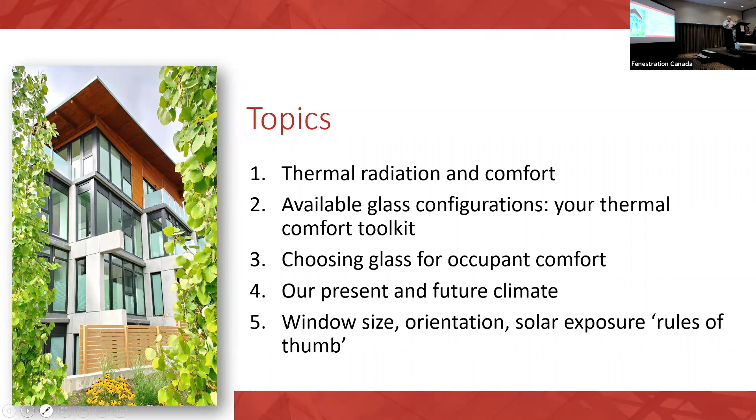I'm going to speak a little bit about our present and future climate, because in the context of solar heat gain, we need to be not looking at the past, but looking at the future of our climate, and perhaps radically rethinking how we approach that subject. And then some rules of thumb. I was hoping to come up with some really intelligent rules of thumb, and realized it wasn't that easy. But I put some thoughts together, and you'll see where I'm going with this as we move along.

So just to have a better understanding of thermal radiation and how we react to things in our environment, I've taken some text here from the WINDOW 7 user manual. WINDOW is the software program that we use to evaluate all these glass properties. All objects emit invisible thermal radiation, right? With warmer objects emitting more radiation than colder ones.

If you hold your hand in front of an oven window, you'll feel the radiant energy emitted by that warm surface. Your hand is also radiating heat to the oven window. But since the oven window is warmer than your hand, the net balance of radiant flow is toward your hand, and it feels warm. That's what's going on when we feel heat and cold. We are radiating, all of us, each one of us is radiating heat right now. That desk you're sitting at is radiating heat energy. So it's constantly, everything that isn't at absolute zero is radiating some amount of energy.

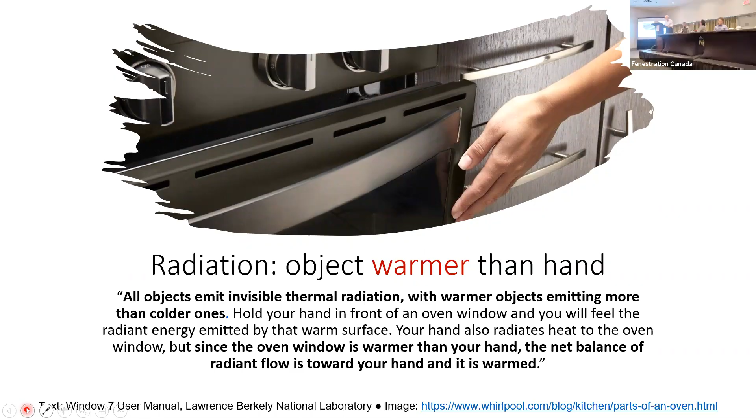So as I said, all matter with a temperature greater than absolute zero emits thermal radiation. Infrared radiation emitted from animals and humans is an example of thermal radiation. That's wisdom from Wikipedia. Interestingly enough, the visible spectrum, that colored rainbow up there, everything we see on the spectrum of solar radiation in the universe is thinner than the green line going down to the bottom chart, which is trying to show an almost infinite array of solar radiation wavelengths, or a bunch of solar radiation period. So we're talking about heat, what we perceive to be radiant heat. It's a portion of this invisible spectrum.

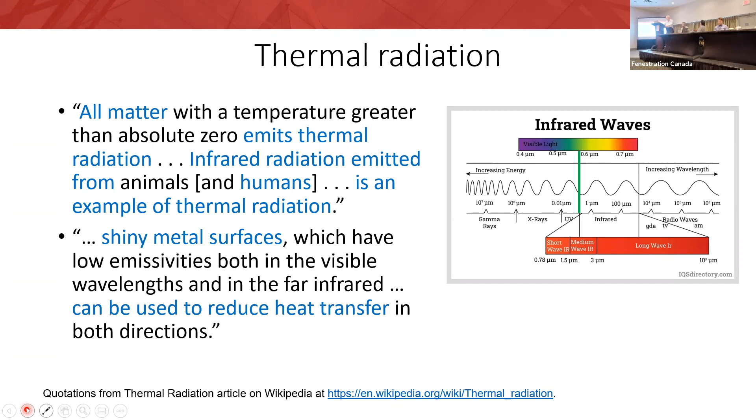This article also goes on to say, and I like the wording they use because it's layman language: shiny metal surfaces, which have low emissivities both in the visible wavelengths and in the far infrared, can be used to reduce heat transfer in both directions. Shiny metal surfaces is what we have in low-E coatings. These coatings are composed of shiny metal atoms applied to glass surfaces at a density that transmits visible light, but also reflects most of the far infrared radiant heat spectrum. So visible light goes through it, but the longer waves of heat bounce off the metal particles based on the density that they're scattered on that glass.

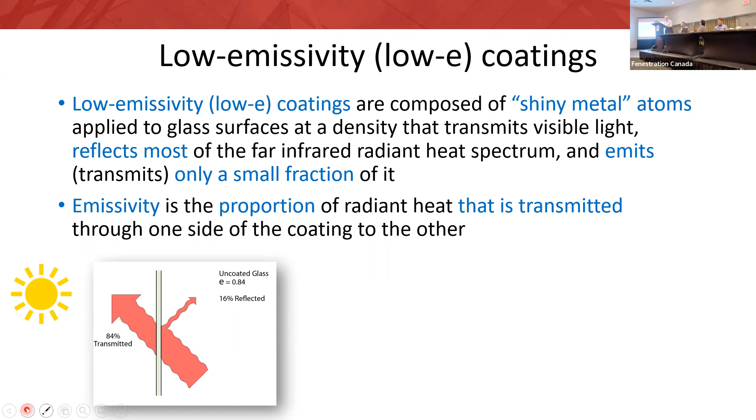Only a small portion of that radiant heat actually makes it through that coating. The property called emissivity is the proportion of radiant heat that's transmitted to the other side. Ordinary uncoated float glass transmits about 84% of the heat energy, reflecting only 16% back into the room. So you've got an emissivity of 0.84.

If we take one of the earlier generations of low-E coating with an emissivity of 0.2, that coating reflects 80% of the heat back into the room, still transmitting about 20%. Our best low-E coating in the residential window sector would be a triple silver type coating, with an emissivity of 0.02, meaning only 2% of that radiant heat energy is transmitted through, and 98% is reflected back into the room.

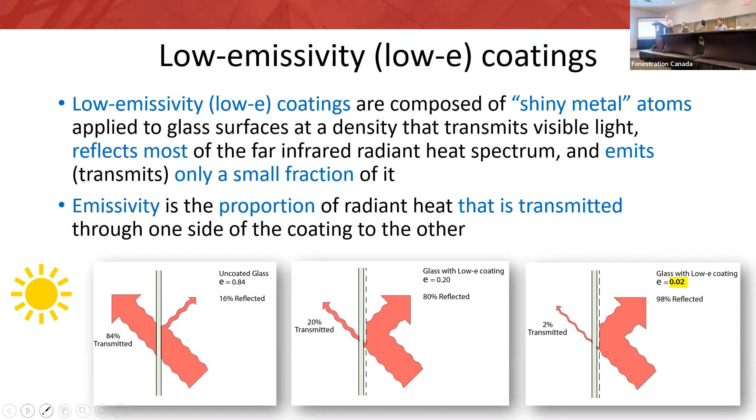So what we really have in low-E coatings are highly effective reflective coatings that are essentially invisible, but doing a lot to keep the heat in our buildings. The coating is the single greatest innovation in the energy efficiency, solar heat gain control, and comfort performance of window glass. We also talk about argon fills and warm edge spacer systems - those help make the insulating glass unit better, but it's the coating that's doing the heavy lifting.

There's been a lot of coatings developed by a lot of manufacturers. When you combine these coatings with two or three or more glass layers, you have the ability to significantly control the shorter wavelength solar radiation from the sun, as well as the longer wavelength heat being emitted from the warm surfaces inside the building.

The difference between high solar and low solar coatings is both are doing about the same job keeping the heat in. Their U factors don't vary very much, but the high solar gain coatings are letting in more of the solar energy spectrum, the sun's heat, while the low solar gain coatings have a denser particle density and try to capture mainly visible light. They're capturing less of that solar heat energy, but still doing a lot to keep the indoor heat in.

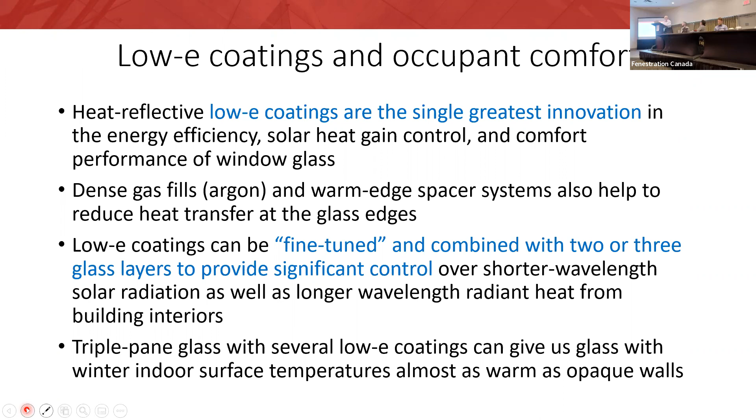We know that with triple pane glass having at least two low-E coatings, we have glass that will have winter indoor surface temperatures just a couple degrees cooler than our walls. And when you get that balance right, you feel comfortable beside the window or away from the window.

These are diagrams you often see when people talk about passive house, but they're very useful in explaining this concept. Research has found that when the temperature difference between different wall surfaces in a room is within about 4.5 degrees Celsius, most people will feel comfortable anywhere in that room. Some people will still be uncomfortable near the colder surface, but by and large most will feel comfortable.

That's really the whole passive house idea - that's why they wanted triple glazed windows before anybody else thought that was a great idea. It was so you could eliminate space heat, so you wouldn't have to have a heat duct or a radiator by the window, because the window itself was warm. So you could actually reduce your heating plant and just provide a minimal amount of conditioned air through the building, because wherever you were, you'd feel comfortably warm.

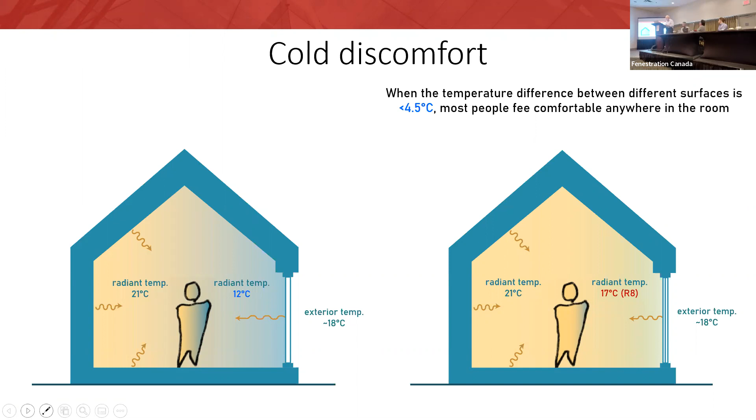So if we have a situation where the indoor radiant temperature is 21 degrees, even if it's -18 outside - that's the NFRC winter design conditions - if you have glass that will give you up to around 17 degrees Celsius, or an R8 window, you've got that comfort condition where you don't have to feel cold discomfort, even with a large glazed surface.

When the temperature difference is greater than 4.5 degrees between the wall surfaces in the room, most people will feel cold near that window. That sense of cold, where one surface is warm and the other is cold, and how you feel in the middle, is called radiant asymmetry. In other words, part of you is encountering warmer temperature while another part encounters colder temperature, and radiant asymmetry is one way of characterizing an environment where some surfaces are colder than they should be for occupant comfort.

It's interesting - this is John Straube, some of you may know or have heard of him. He's a building science professor at Waterloo University and a principal at RDH Building Science. Early this winter he posted this on LinkedIn, bragging about his great windows: 'Looking out at -23 degrees Celsius this morning is very nice and cozy from behind triple glazed fiberglass framed windows.'

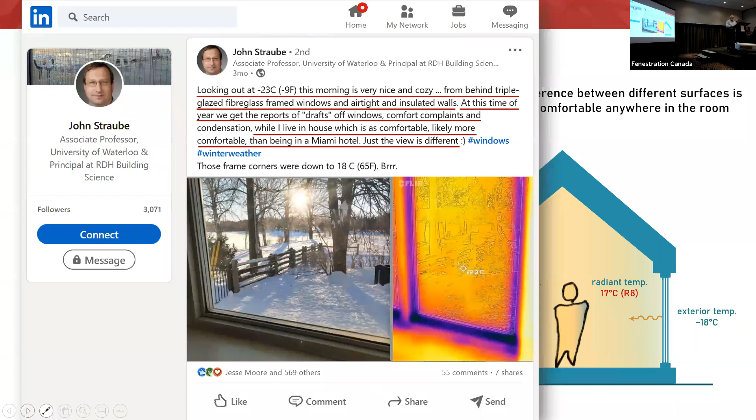At this time of year, we get reports of many people complaining that they're cold near their windows - comfort complaints, drafts by the window, and condensation. Meanwhile he lives in a house that's as comfortable, likely more comfortable, than being in a Miami hotel, just that the view is different. So he's telling us a little more about his window.

There's a comment: those frame corners are down to 18 degrees C. He actually used an infrared thermal camera to take a picture of the corner of his window to tell us that those window corners are at plus 18. He says, 'brr, that's cold.'

Well actually, it isn't cold. If it's 18 degrees, he's probably very comfortable - but that's the coldest part of his window. The camera seems to show that his glass is at 22.3 degrees Celsius. So clearly he's got that passive house level comfort beside his window.

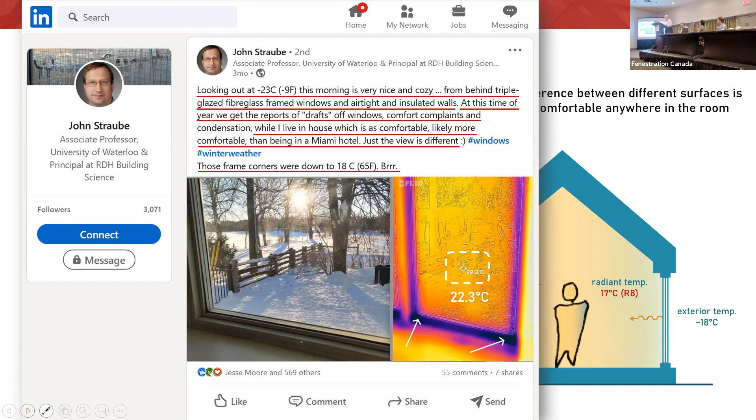We can make these windows today. This window is not a passive house window - this is probably an ordinary fiberglass window that could be 15 years old in Manitoba with a triple glazed package with 2 low-E coatings, and that's what you're going to get: comfort, even when it's really cold outside.

So this could be a cold winter's day in Vancouver or Victoria. In a 1990s home with dual pane clear glass, you'd want to be sitting at least this far from the window to be comfortable. But with the right glass, you'd probably want to sit closer to that window because you wouldn't have to avoid as much cold.

So next thing I want to talk about: okay, that's great, we know some glass products can actually do this, but what about the other glass products? What's the range we have available to choose from in our industry?

This presentation features a table of what I'd call typical representative data for common glass configurations used in the Canadian glass industry. It contains simplifications to help us see both the similarities and the significant differences between the available and widely used low-E coating options we're all familiar with. The simplifications include rounding U factors from 3 significant digits to 2, and ranking the configurations by R value.

R value being the inverse of the U factor, and I'm using inch-pound R factors - the R factors we're all familiar with - in the table. I'm using data computed with Window 6.3, which I did years ago when I worked at Enermodal, trying to understand what range of options the glass products have. I basically used that data set because I had it to create this table.

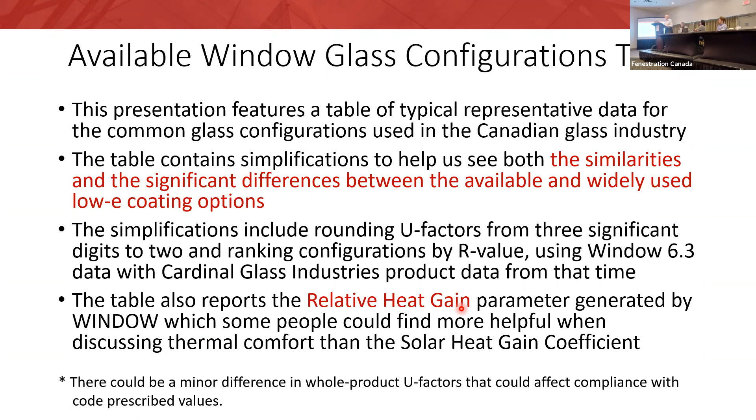It seemed to me that the relative heat gain parameter, in watts per square meter, lets us know how much energy is coming through the different glass options - to me it was more relatable. It's like finding out, 'oh geez, I got a 10% raise' versus 'I got a $12,000 raise' - which would you rather have? A percentage or ratio isn't real to most people, but dollars sound real. So I've added that as a parameter.

So configuration is just a particular arrangement or pattern of a group of things, and that's what this table is reporting: configurations, and you'll see why. I was going to review the terminology.

When we use NFRC standards to evaluate these energy parameters, the sun is always normal to the glass, at right angles. In real life, it's rarely in that position - a little in the morning in the east, a little in the west, but we hardly ever see the sun coming through our windows directly in line. However, everything measured about glass in this program is measured at 90 degrees to the glass. You can still get good comparisons of how this performs relative to that, even though that condition doesn't appear in the real world or your experience of life.

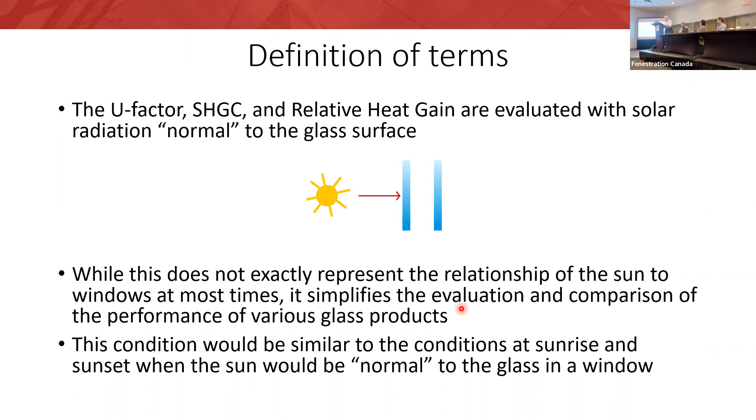So there we go. What's good about U factor is that it tells us how much heat is flowing through a window. It's watts per square meter per degree of temperature difference between indoor and outdoor. So if you know the temperature difference between indoor and outdoor, and you know a U factor, you do a quick multiplication and can say how many watts of energy are being transmitted through that window. Again, under NFRC standard conditions - your mileage may vary in your house, but essentially it should be pretty accurate.

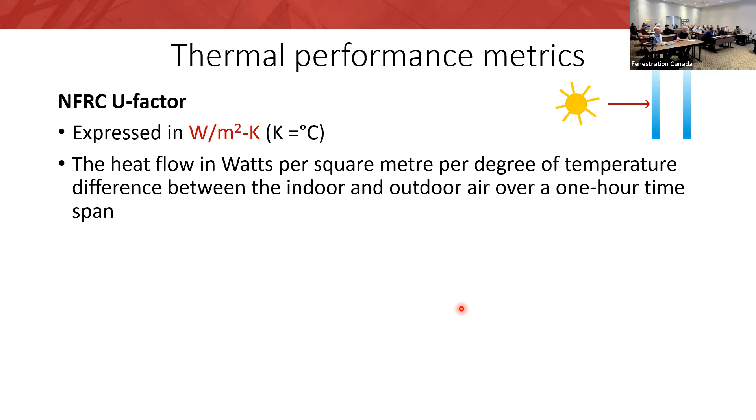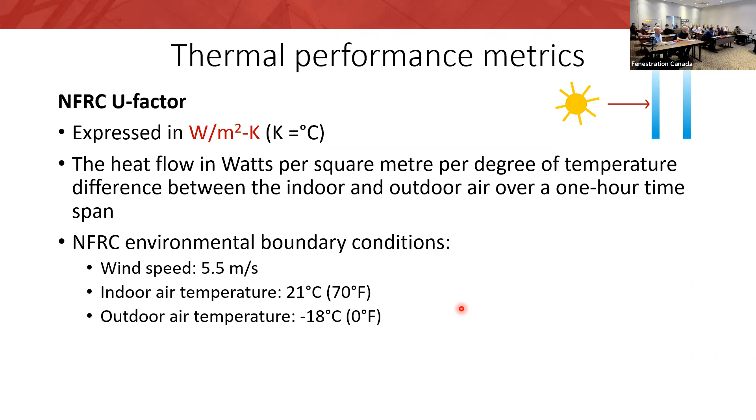And that's where relative heat gain, I thought, would be helpful to counterbalance that. If that's the heat going out, what's the heat coming in, in watts? That's what the relative heat gain parameter gives us. We've got boundary conditions for NFRC. We've talked solar heat gain coefficient - I think we all know it, it's just the proportion of solar radiant energy that comes through the glass. Emissivity is the long wave radiation, infrared radiation of heat - the emittance is the part that goes through the coating, and the reflectance is what gets reflected back in.

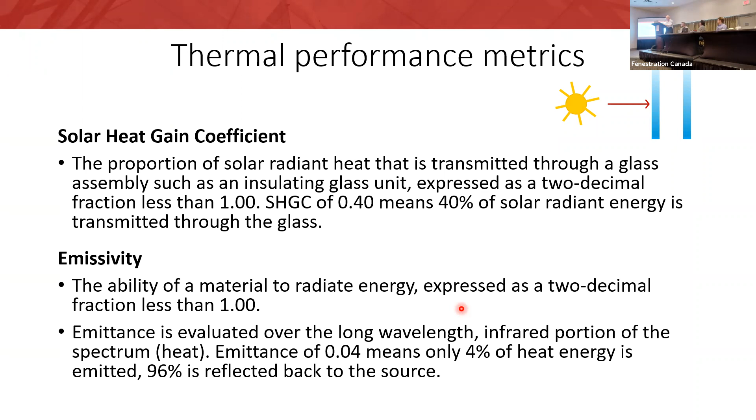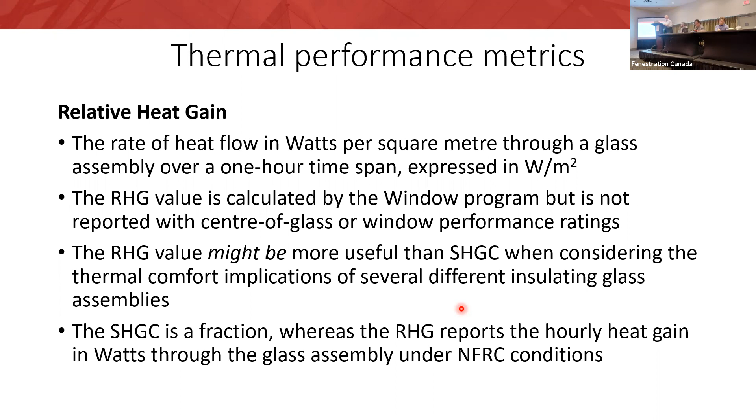So relative heat gain - I guess I ran ahead of myself and told you about it already. It's calculated by window. It's not normally reported, but it's easily available, and I think it might be more useful than talking about how much heat gain we'll get with this coating or that coating. What if I've got a window this big, but this one's 4 times bigger? How much more heat am I going to get out of the bigger window using the same coating? Solar heat gain won't help you with that - you're multiplying, you have a ratio but no quantity. With relative heat gain, you can say the relative heat gain for this window is this much, here it's that much. Now you've got a sense of it, because it could be a lot of heat, or you might say, no, that's fine, I can live with that, especially when you compare it with other options.

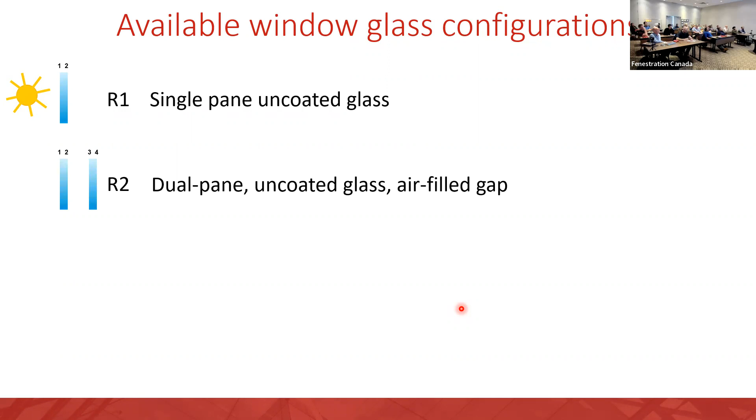So the available window glass configurations - I've tried to simplify it, and here's what we're talking about. We started out with only one kind of glass, right? Single pane - well, used to be other kinds of glass, we finally had float glass. We've got double pane. We're going from R1 in a single pane of glass to R2 with 2 panes of glass. Big improvement, right? 50% improvement, 50% less heat loss.

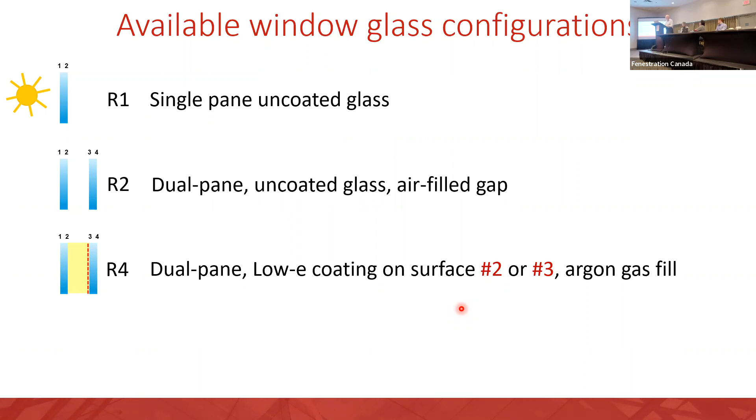However, we can do better than that. Then we came up with the idea of low-E coatings and argon fill, and whether your coating is on the 2 or on the 3 doesn't matter - your R value is the same, still an R4. The U factor is the same, but you'll get a little more heat captured with the coating on the number 3 surface than the number 2 surface. R5 - well, we just add one more room-facing coating on this double pane unit, and now we go up to R5, with 2 low-E coatings.

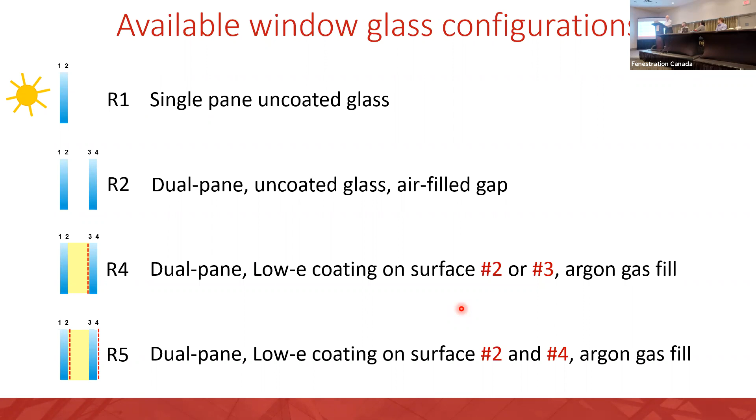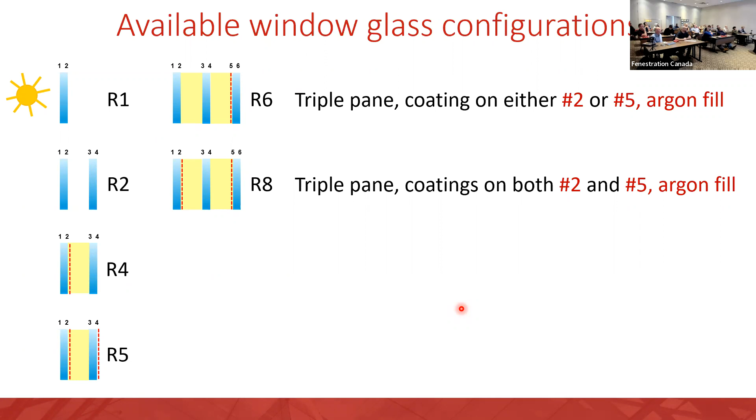Then we add a second low-E coating, and now we're up to R8 - triple pane, coatings on 2 and 5, argon fill. Any passive house window will work with this kind of glass. Any North American window will be fabulously comfortable with this kind of glass, even if it's not in a passive house frame.

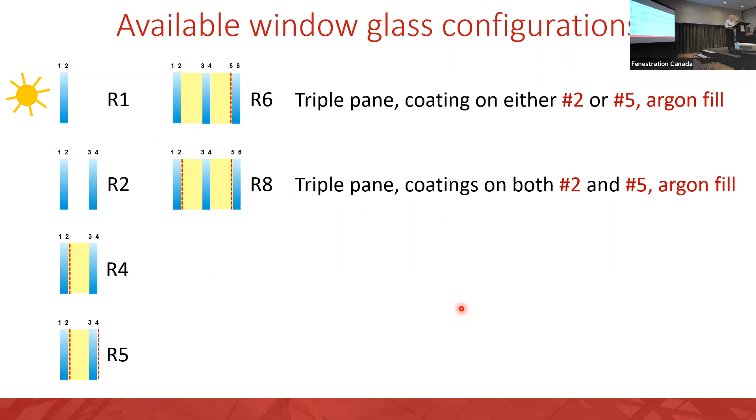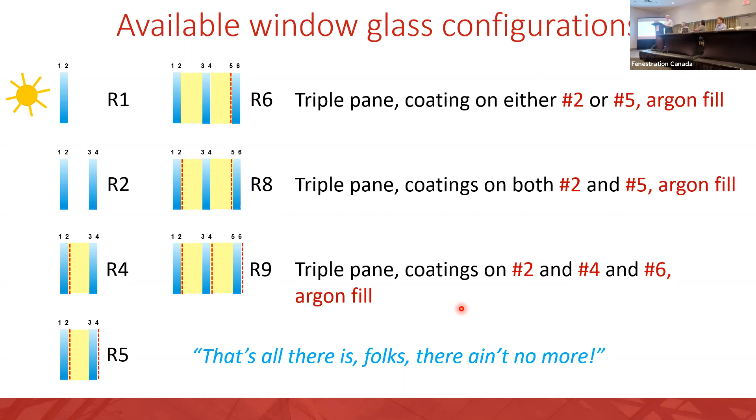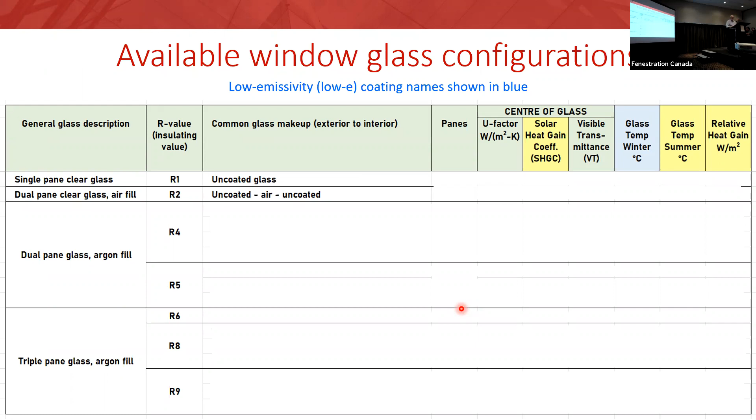In my available window glass configurations table, I've ranked the data by R value, from R1 through to R9. I've also classified it by whether it's single pane or dual pane. I've included the uncoated glasses for reference, as a frame of reference, because that's the worst case scenario. In BC, we still have homes with single glazing, and many buildings with double glazed clear, probably in other parts of Canada too. So comparing against, especially the R2 option, is relevant.

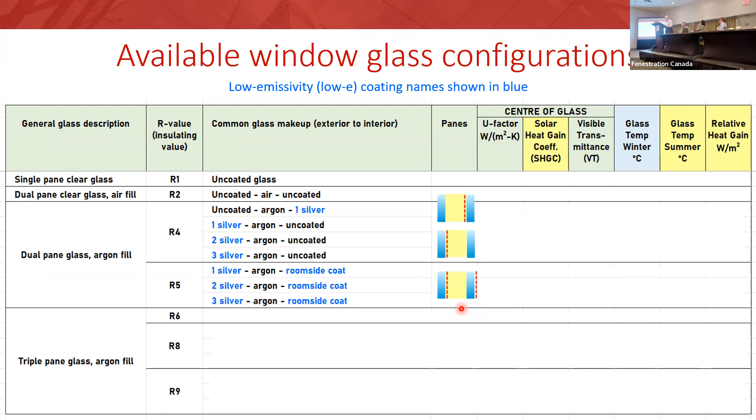So here's how our configurations stack up. I've put the pictures beside the text, and I've highlighted the low-E coatings in blue. I'm classifying them as single silver, double silver, triple silver - that's common terminology in our industry. And I'm calling the room side coating 'room side coat' in plain English. As you add more layers of glass and more coatings, you get higher R values, better insulation, and less heat loss.

If we look at our 2 existing glass products, we see that double glazing made a big difference. It cut your U factor in half, cut your heat loss in half. It brought your glass temperature up from -9 to +7. Granted, this is under NFRC winter conditions, so it's -18 outside, +21 inside. And it's got quite a lot of solar heat gain - that double pane unit has almost the solar heat gain of a single pane of glass. So great for solar heat gain, but not if you're overheating.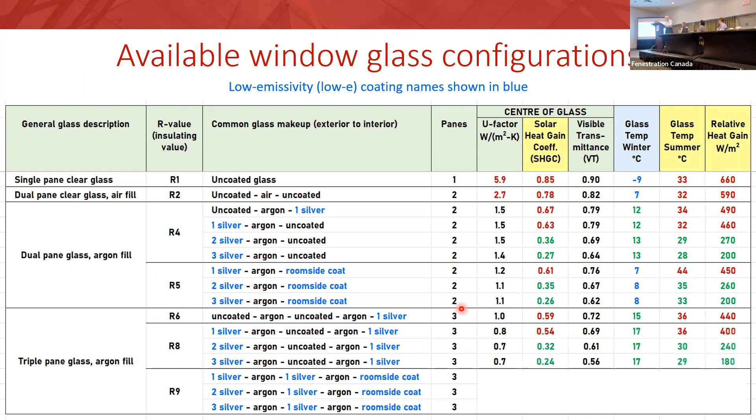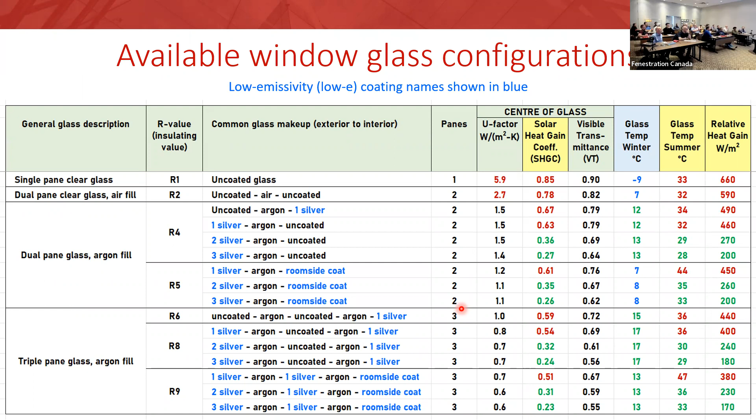If we now look at the R4 products, you'll see we have high solar with the red solar heat gain coefficients, and low solar. If we do the same thing for the R5 group, the R6, we just go down and they'll fill in the whole table. What we're seeing is that even though we have 3 coating options, one is really high solar, and the other 2 are both low solar - just 2 levels of low, below that.

Highlighting glass surface temperature - this table tells us our double glazed clear glass had a glass surface temperature of 7. Well, guess what? So does an R5 window, which has 2 low-E coatings, but one of them's on the room side. That room side low-E coating is reflecting the thermal heat in the room back into the room. So the glass stays cold, the glass temperature is cold, but that low-E coating is still keeping the heat in.

What does that tell you? Well, you might think, oh, if it's a cold surface temperature, then I'll be cold standing beside that window. But you'll be surprised - no, it feels warm. Why does it feel warm? Because it's got a low-E coating. Your own body heat is hitting that coating and coming back to you. So even though the glass temperature is cold, you feel warm. Nifty trick.

However, that cold glass surface temperature might still contribute to a draft in the room, because the air temperature can be cold. If the air is near your body temperature but you have a cold surface, the air will cool, it'll want to fall, and you get a convection current going in front of the window, creating a draft. The bigger the glass, the bigger the draft, the more discomfort there is.

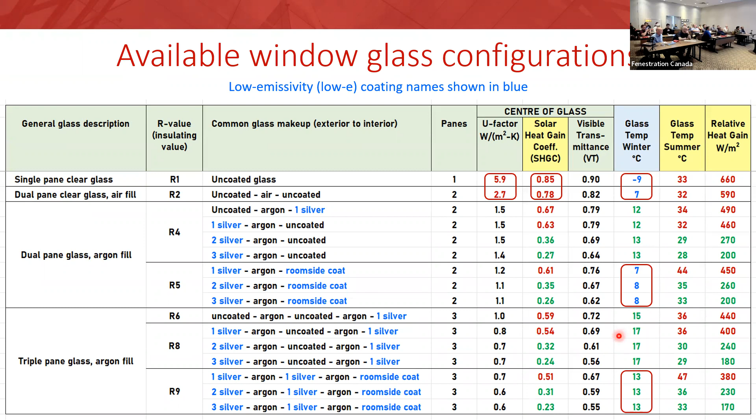So when you look at the products that don't have a room side coating, you'll see the glass surface temperature is quite a bit warmer - they're all around 12 or 13 degrees. You'll notice that even though the R8 family, which I'll call the passive house glass family, gives you a nice warm 17-degree room side temperature in this cold Chicago winter, when you add one more low-E coating, your glass temperature is back to where it was with a double pane unit. So again, is that a wise choice? If you really want a slightly better R value from R8 to R9, knock yourself out.

You're going to spend a lot of money, but you're not going to get much bang for your buck. It's not going to save you $1,000 in energy bills, and you'll probably have drafts if your windows are large. If the windows are small, it might work fine for you.

So what I'm trying to show you is the utility of this table. We don't have to know the glass thicknesses, we don't have to know the exact gap. The numbers will likely not vary with those parameters. We've rounded them to group them into meaningful categories so we can understand what they are and what they do.

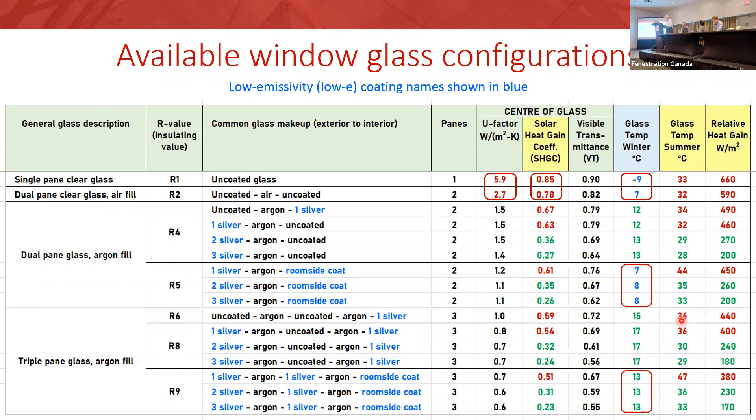But it's helpful for decision making. You can explain almost everything you want to about thermal comfort with reference to this chart. We can focus on the low solar heat configurations, where we see that the solar heat gain coefficients are all pretty similar across all of these, whether it's more or less low-E coatings, whether it's 2 or 3 panes of glass. We're looking at mid to low 30s for a double silver, and mid 20s for triple silver. So this is where regardless of panes, the coatings are doing the job on solar heat gain.

Look at the relative heat gain numbers too. They're all less than half of the double glazed clear unit. This tells me two things: good news, it's less than half; bad news, it's not lower. But that's the best we have, we don't have anything better. So this is the limit of the glass technology with respect to comfort, and it's good to know what that limit is.

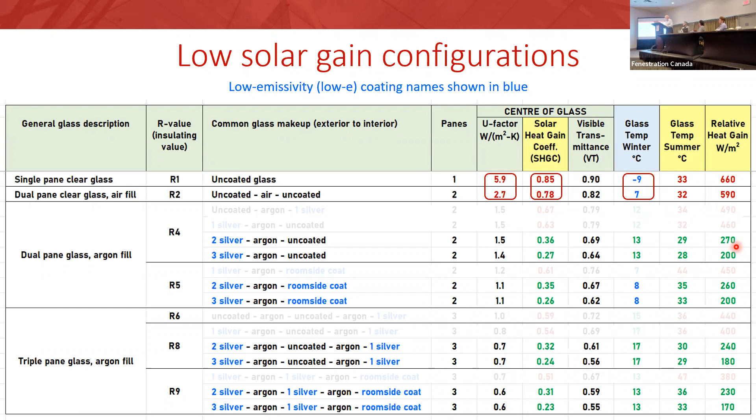If we look at the high solar gain configurations, we see that they're quite high. The solar heat gain coefficients are really close to those of double glazed clear glass. And look at the relative heat gain numbers - if you round to the nearest 100, you're going from 600 to 500 to 500 to 500 to 400 to 400. So all of those configurations, double or triple pane, just by being high solar, just because of that one silver coating, they're all letting in a huge chunk of extra solar.

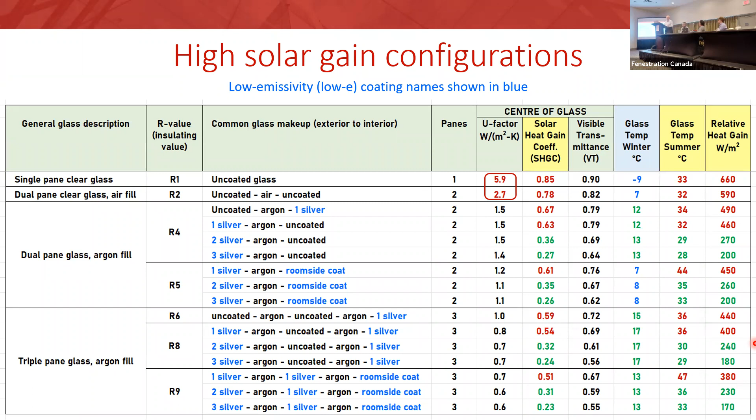Now we know the magnitude of high solar versus low solar is about 50%. Your low solar products are going to put in about half as much heat as your high solar products will, across the whole spectrum for every category. This is helpful stuff to know, to appreciate.

This is what I want: yes, focus on the high solar gain. So we've already covered that.

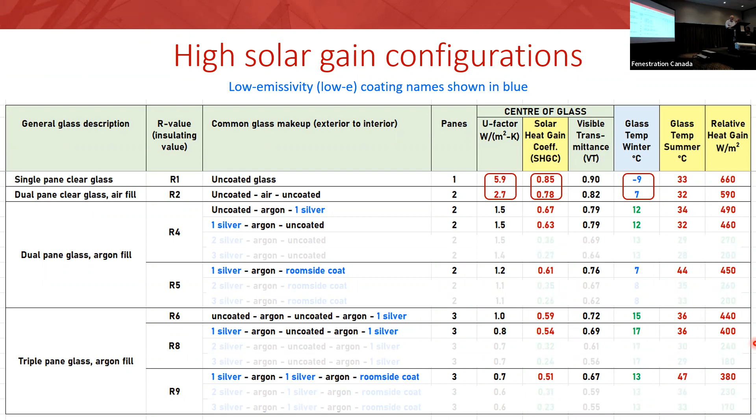I think we need to be concerned about the overheating potential of high solar glass. We've seen that no matter how many layers of glass and how many coatings you have, if that first layer is a high solar layer, it's driving the solar heat gain of the rest of the assembly - it's driving the bus. So the high overheating potential of high solar gain low-E glass, with relative heat gain values of 70 to 80% as high as dual pane clear uncoated glass, should not be underestimated, while some 80% of the heat gain through uncoated glass can radiate back to the outdoors.

So let's go back to the dual glazed clear window. It's bringing in a ton of solar gain, but 84% of that heat is going back out through the glass. It warms up your house, but that heat in your house is running right back out there - 84% of it is escaping.

Now you add a low-E coating, and you're going to maybe absorb only 80% of the solar heat gain of the double glazed clear, but now it's trapped in your house. It's turned into long wave radiation, it hits the window and stays inside, and starts building up faster and faster because it's got nowhere to go. This is why a high solar low-E window will retain and heat up a home much better than an ordinary double glazed clear. The double glazed clear has more solar heat gain, but it can't keep it indoors, while the low-E coating in a high solar window keeps it trapped indoors.

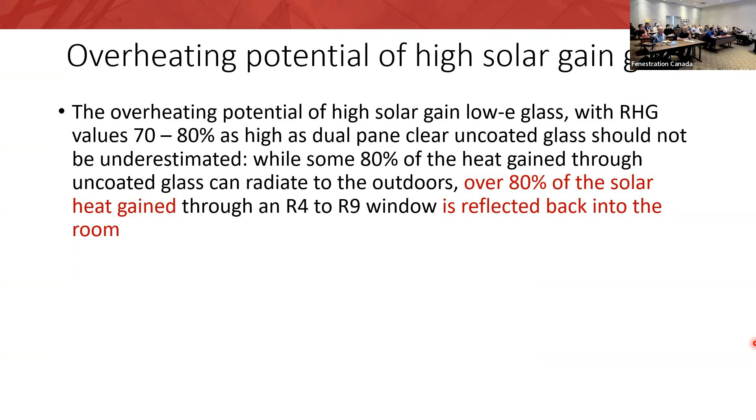The most recent study of energy rating in Canada, done in 2013 by RDH, included an extensive chapter on comfort that nobody paid attention to, including me. I want to shoot myself when I realized it, because at the time I was too busy, I wasn't working at RDH, I was just involved in getting the project going.

But when I studied that chapter, I realized it showed that high solar gain windows resulted in thousands of hours of overheating discomfort per year in cities across Canada. Some better, some worse than others, but in no case was it less than thousands of hours a year of overheating. And this was in an archetype home with a 15% window to floor ratio and air conditioning in geographic areas where air conditioning is common. So even with air conditioning, thousands of hours of overheating.

And I think somehow that was missed or not really discussed as being relevant. I think it's highly relevant.

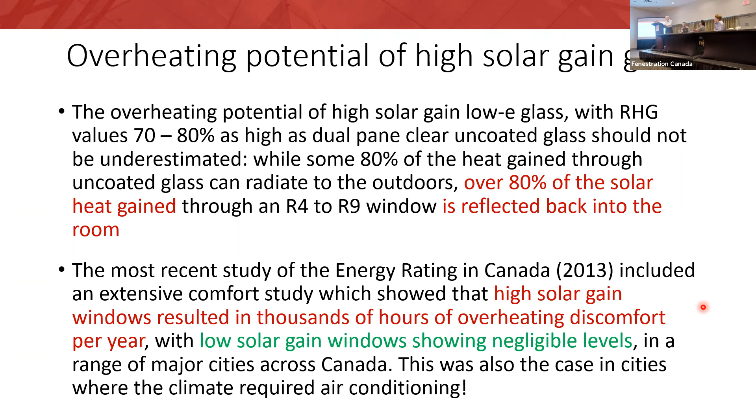So the low solar gain windows, on the other hand, you see charts where the high solar gain products are off the charts with discomfort, and the low solar gain products are right down at the bottom, negligible. And that was before we started thinking about climate change, which we'll get to in the section after this one.

So if we want to think about choosing glass for occupant comfort, here's a chart from a report for NFRC when they were looking at a comfort rating for windows. They never introduced one, but a group that worked on whether they could develop a comfort rating produced this report, and it had a nice graphic in it that I thought was helpful here.

So low E coatings improve thermal comfort 3 ways. One is they can reduce the solar radiation coming in, so a low solar gain coating will do a really good job of blocking a majority of the solar heat gain coming into your home. And all the low E coatings, high or low solar, do a great job of keeping the long wave radiation in your home. Once you've heated your home, whether by the sun or your heating system, it's there.

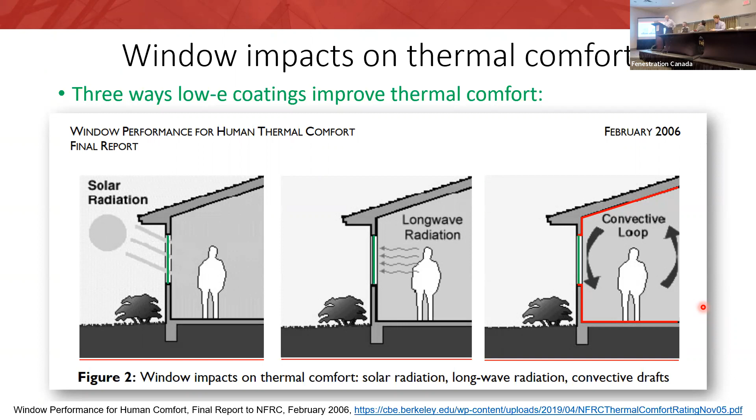The third one is convection. If you have a cold glass surface temperature, then you've got this kind of a convective loop going and a draft in front of your window. And if you put in a low solar coating, or actually any coating that will warm the glass surface - in other words, not a room side coating, but an internal coating - that indoor glass surface temperature will be warmer. It will break the convective loop and lead to greater comfort.

So glass options to minimize overheating: simple, avoid high solar gain glass. High solar gain glass, just don't use it. Because it's only the high solar gain ones that bring in the solar heat gain. So just don't use it. There, you've solved the problem. You've already eliminated one source of overheating discomfort.

For larger windows exposed to direct sunlight, you may want to even have less heat come in. Then you could choose the triple silver instead of a double silver. Each of these coatings from single to double to triple has slight differences in tint when you look at them sideways, and the visible transmittance gets darker as you add more metal particles onto the glass, so you start getting less light transmission. So there are times when you can be comfortable with a coating that isn't the best coating, just because you want it to be brighter and have more sunlight coming into your home. So there are times when you're going to want to think about that, not just your thermal comfort.

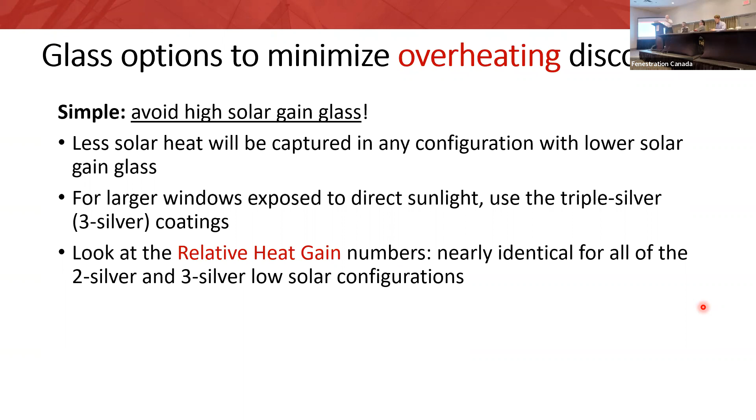So yes, if you're expecting a lot of solar heat gain, use the triple silver coating for sure. And then look at the relative heat gain numbers. They're nearly identical for all of the 2 and 3 silver low-E configurations, because the relative heat gain is triggered by how much solar heat gain you block, no matter how many layers of glass and coatings you have after that.

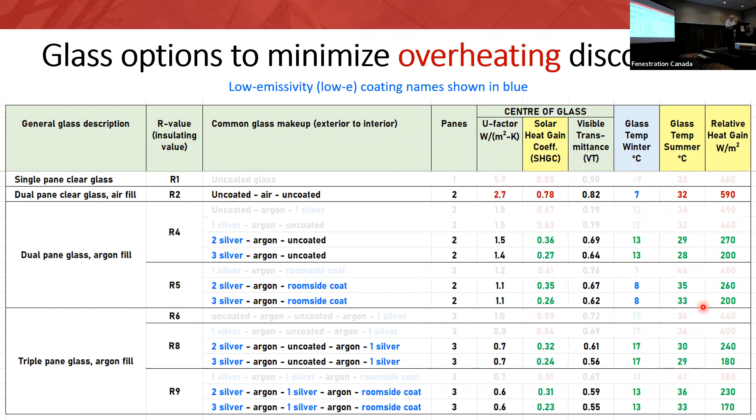Glass options to minimize cold discomfort. Simple: choose the glass options with the warmest glass surface temperature. That's what's going to give you your comfort. Warmer glass will lead to less radiant asymmetry between windows and walls, and therefore greater occupant comfort.

It will also reduce the intensity of downward cool air drafts at the indoor face of windows. The colder surface temperatures of windows with room side coatings may result in some discomfort from drafts, but not from radiant asymmetry. The low-E coating on the room side glass surface reflects your body heat back towards you. So there you go: cold discomfort, warm glass surface temperature.

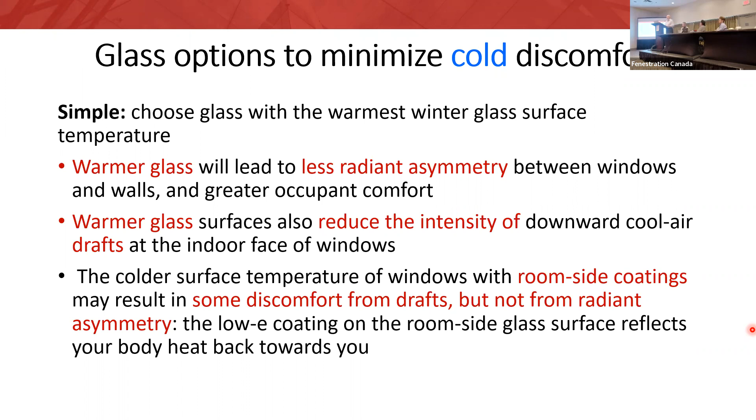Overheating discomfort, avoid high solar gain glass. These are simple decisions you can make. I think this should help people selling windows help their homeowners choose better glass products, in plain and simple language that they can understand without even having to talk about the ER, because it's not the ER that's the problem. It's solar heat gain that's the problem.

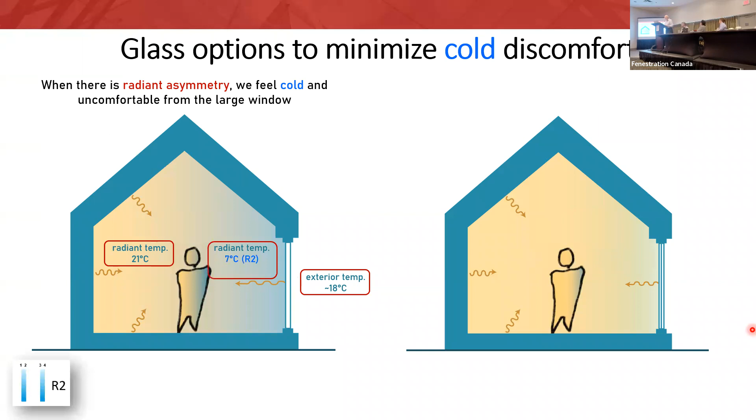So for some reason I added a slide to revisit radiant asymmetry here, so I'll just go through it. Under NFRC conditions, we have minus 18 outdoors, 21 indoors. If we had dual pane clear glass, R2, that indoor surface temperature is 7 degrees Celsius. Not very comfortable in terms of radiant asymmetry. And that's why George here is sitting so far from the window.

If you improve that glass to what was the state of the art unit 20 years ago or more, that's a big improvement. We now have the glass surface temperature at 12 degrees. Big improvement if you were living with dual pane clear, and now you've got this, you'd be very happy. But you still have radiant asymmetry under these cold climate winter conditions.

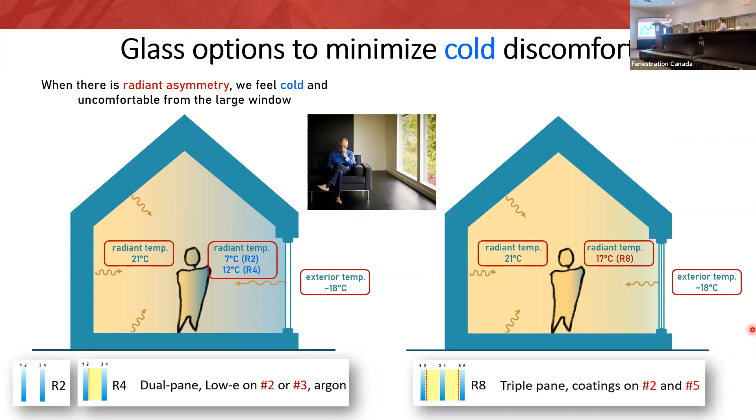Now let's examine if you just improve that window one stage further, as we said, an R8 triple pane with coatings on 2 and 5. You now have a radiant temperature—by the way, this 17 degrees is an NFRC number, not a passive house number. Now you have a 17-degree radiant temperature from the glass, and radiant asymmetry is minimal, and most people would feel comfortable near the windows.

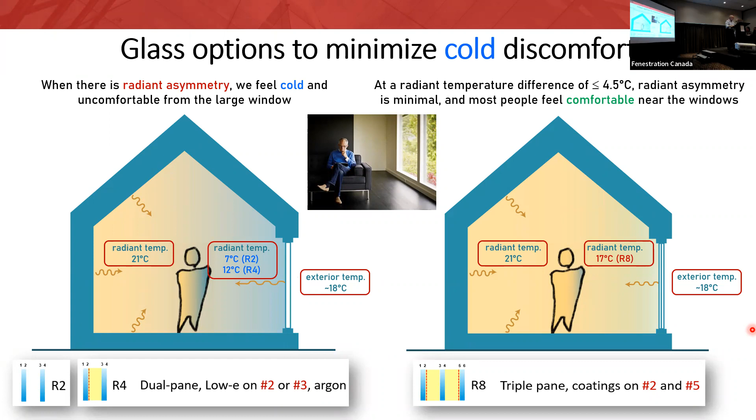And I guess I kept the slide because it had the pictures of the glass below. This could be in a poster, in a window showroom, telling you why you should spend extra for that triple glazed window, because you're just going to be comfortable.

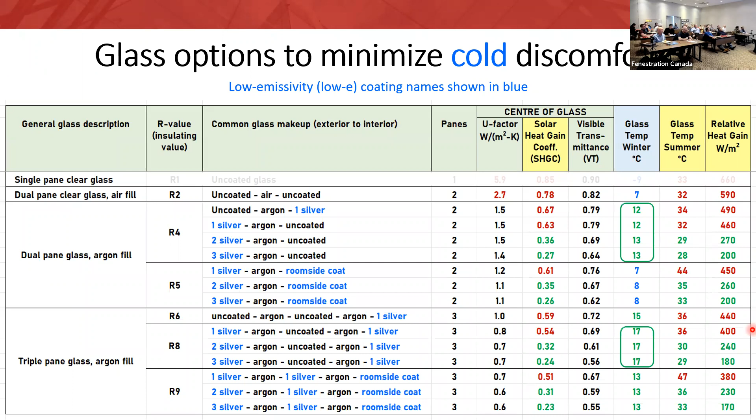So we're back to glass options for cold discomfort. We've covered that, that's it. So that's the paradigm I'm approaching this with. We've now talked about dealing with overheating discomfort, with cold discomfort. We can manage it with the glass options we already have today.

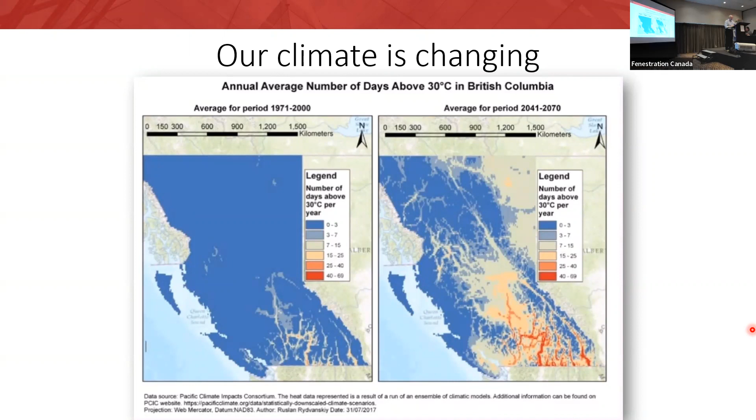So from my point of view, it's not 1989 anymore. The energy rating was proposed in a 1989 paper by Enermodal Engineering, and it's been a code compliance path since the 2010 National Building Code started regulating these factors in energy ratings. Since then, Canada's climate has warmed considerably, with significant warming projected in the next two decades and beyond. We have to rethink our assumptions about the merits of passive solar heating strategies.

I really believe that, and I think that's important for the energy rating, because it is a passive solar heating strategy that's uncontrolled in the sense that it's not designed in. You didn't design your house around passive solar heating. You just bought an appliance, plugged it into the wall of your house, and that appliance is generating heat that you can't control. And as the climate changes, you won't be able to control it either.

We need to begin to consider the risks of relying on controlled... well, we'll get to that in a minute. Today, we are building and renovating buildings that will still be occupied 30, 50, 80 years from now, with windows that could last up to 50 years. Our insulating glass quality has gone up tremendously in the last several decades, and there's no reason why a good window cannot go through several rounds of glass replacement in its lifetime. So our windows are better than they used to be, and these windows are going to be around for a long time.

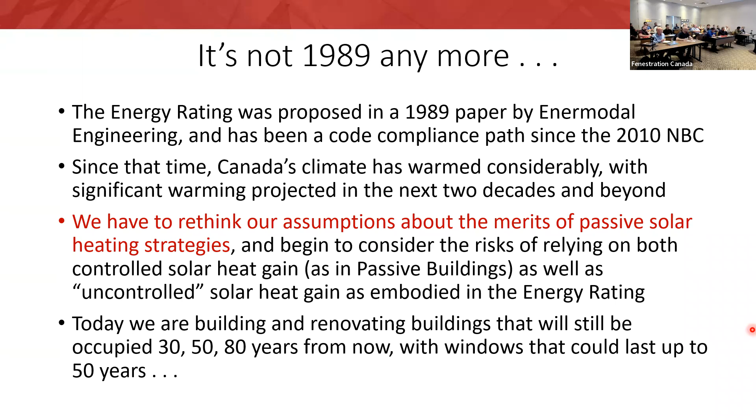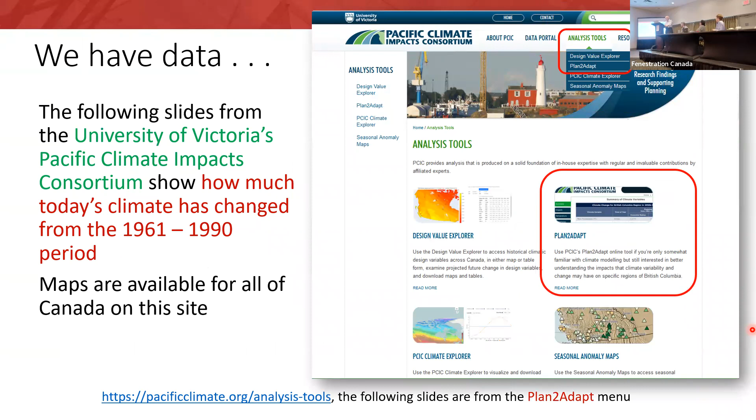So I checked out the Pacific Climate Impacts Consortium at UVic. They have some helpful climate data that you can look up all over Canada and get all kinds of data about the changing climate. I looked at their analysis tools and the Plan2Adapt area, which is trying to give you a forecast of the future climate so that we might adapt and prepare for it. So here's some screenshots that I want to show you.

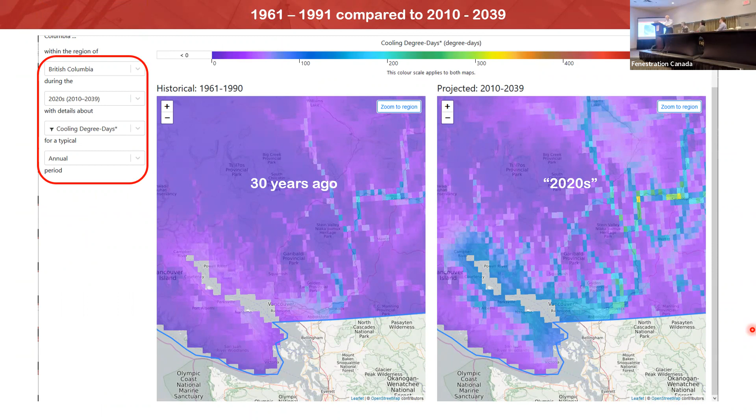Because the session today is in British Columbia -- I know it's being broadcast across Canada, but we're here at the Pacific chapter meeting in Vancouver -- we're looking at the data for British Columbia, for the 2020s, which they describe as 2010 to 2039. This will be the average of 2010 to 2039 warming in the table for the 2020s. And we're going to compare 30 years ago to today for Victoria and Vancouver.

So in the climate up to 1990, this is when the energy rating was developed, Victoria had something like maybe 20 to 30 cooling degree days, and Vancouver had roughly 50.

Look at the 2020s -- we're in the 2020s now, the early part of the 2020s, because the 2020s here are 2010 to 2039, so we're right in the middle of this. Victoria is now having the cooling degree days that Vancouver had 30 years ago. And Vancouver, which had about 50 cooling degree days, is now at 150.

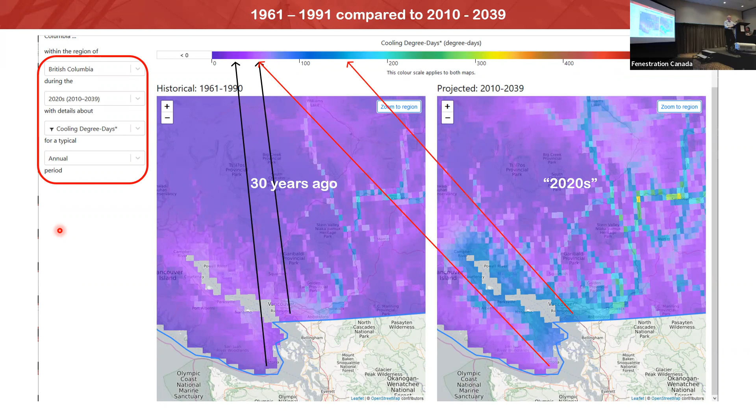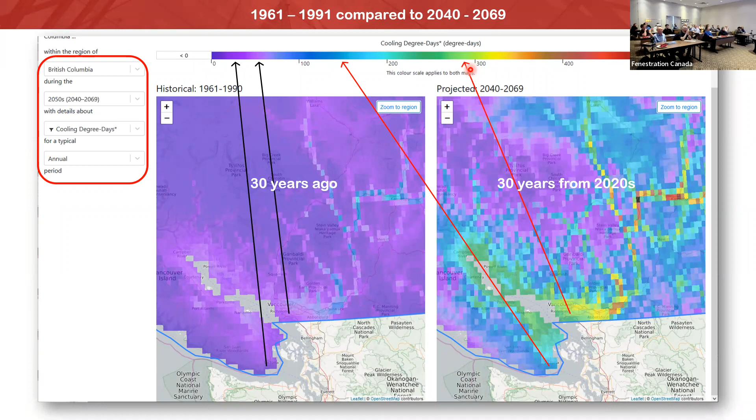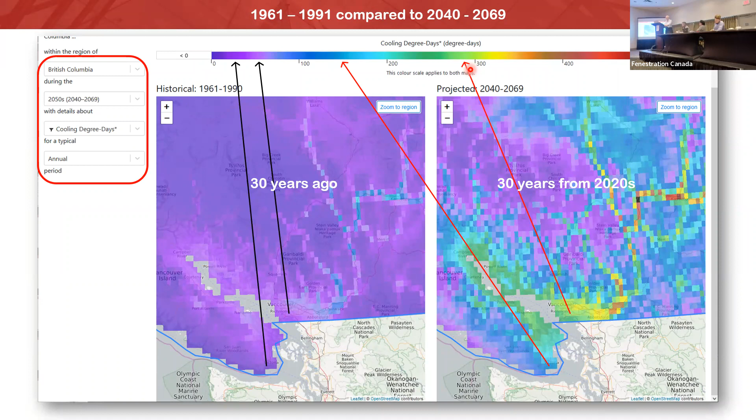Okay, there you go, so it's not trivial. It's not trivial, no. This is a significant warming of the climate that is coming, and the buildings that are being built today will be occupied at that time, most of them, right? We got to think about that.

So now I'm comparing the 2020s to the 2050s. Again, Vancouver Island is going to be where Vancouver is today, and Vancouver is going to be where Osoyoos is. Thank you for that, Murray.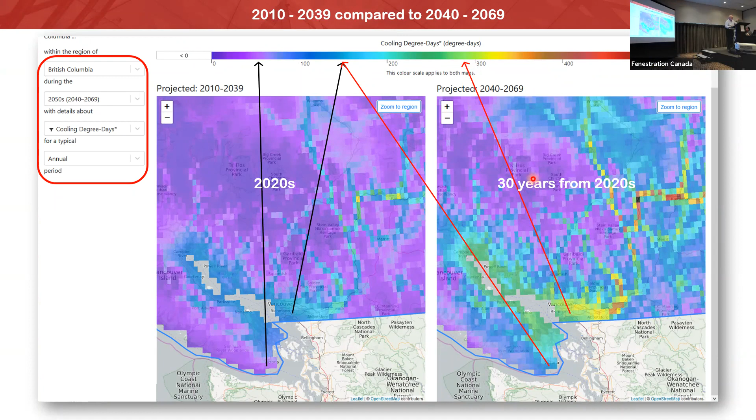So there's a 2020 study UBC conducted. They first hired RDH Building Science to look at the future climate and what can designers do today to design their buildings to still be habitable in their lifetime. What kind of mitigation strategies can we build in now in that building that can be implemented as needed without great costs, so that building will still be habitable in that warmer climate?

Two things I wanted to mention. First of all, from the introduction, I just want to highlight this: in the next 50 years, the Metro Vancouver region is predicted to experience warmer temperatures, increased summer droughts, and more intense winter precipitation. Warming temperatures will likely lead to a decrease in heating demand by almost one third and an increase in cooling demand by nearly five times over current demands by the 2050s.

Designing for future climate resilience leads to a building design that can respond to the rising temperatures while also reducing the energy consumption and carbon emissions by decreasing the demand for mechanical cooling. So we don't want to have to put in a ton of mechanical cooling in these buildings if we can make them more resilient to begin with.

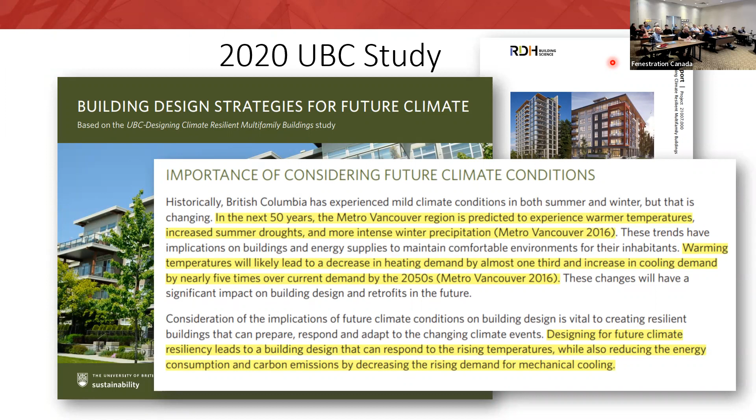That's beyond my scope. So, implications of a changing climate: solar heat gain will not be needed to reduce heating demand. Duh, climate change is taking care of that. Sorry, that was kind of rude. Solar heat gain will increasingly affect the comfort and well-being of building occupants, but in a detrimental way, as the buildings we've built and are continuing to build today cannot be easily adapted.

Third point is that some recently built net zero and passive house buildings designed using current building code climate files are already overheating. And people are saying, why is that happening? We've just designed this building to the climate file the code people gave us, and it should work unless we screwed up.

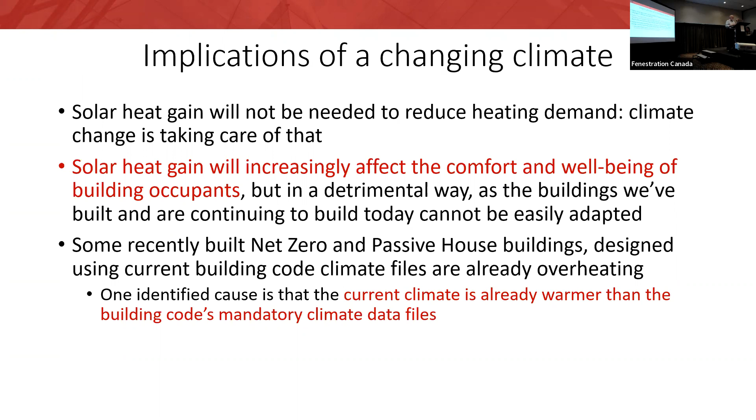Well, one identified cause mentioned in the RDH report is that the current climate is already warmer than the building code's mandatory climate data files. They represent averages over different seasons historically, and they do not represent the climate that we're in today. So this is a problem. We have a lot of problems to solve, folks. Windows might just be the easy part.

So that's the context we're in. So now, are there some rules of thumb, some guidelines, some advice we can give people to try and manage?

In this case, I focus mainly on solar heating discomfort because it's particular to the orientation to the sun, whereas cold discomfort is not. Cold discomfort is a glass surface in your home—doesn't matter if it's the sunny side of the house or the cool side of the house, it's the glass temperature that counts.

I struggled a bit with this because I thought of creating cute diagrams, and then I thought that doesn't make any sense. You can simplify it. I'm just throwing spaghetti on the wall.

The magnitude of both cold and overheating discomfort challenges scale with the relative size and area of glazed surfaces with respect to room size and volume. So I think we need to think about comfort not just as the window to wall ratio of the building, but you have to think about rooms. And what's the window area to floor area? That's one idea of a room, because most rooms are at least tall enough for humans.

They might be taller, but other rooms like this one are very tall. And you should actually think about volume, probably, not just the area. So I don't have any metrics for that, but I do think we need to appreciate that your cold discomfort will be related to glass size, but you know what? Solar heating discomfort will be too.

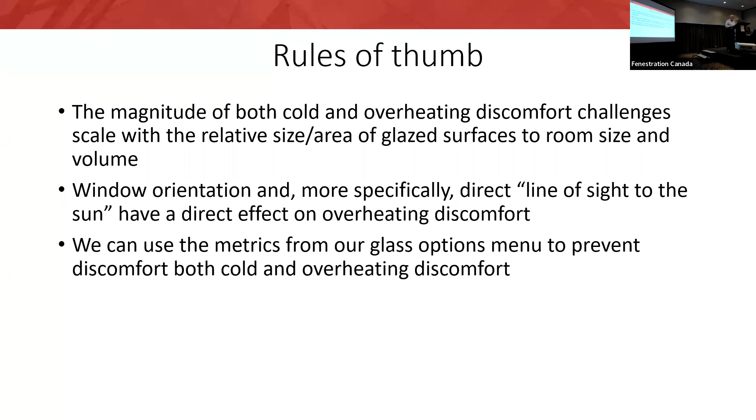Third point is that we can use the metrics from our glass options menu that we talked about to prevent discomfort, to do what we can to prevent both cold and overheating discomfort by the choice of window glass. But we need to appreciate there's a lot we can do with those glass options, but they're limited. They still admit solar heat gain, even the lowest solar gain glass. Depending on what you're doing, it might still be more than you want.

Larger effective window size - you need to appreciate that larger glass areas will have a greater impact on comfort than smaller glass areas. It's helpful to think in terms of window to floor area ratios, to think about that at the scale of the room. A building with low or moderate window to wall ratio may still have rooms with disproportionately high window to floor ratios.

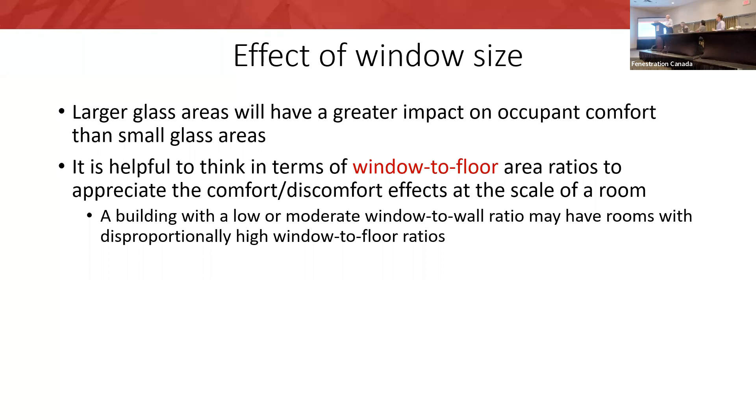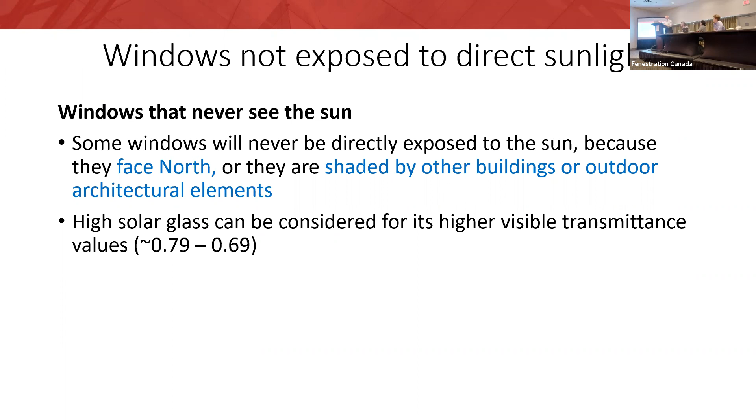Windows not exposed to direct sunlight: if the windows never see the sun, some windows will never directly be exposed to the sun because they face north or they're shaded by other buildings or outdoor architectural elements like shading devices. So sometimes, you've got windows that never actually get direct solar heat gain. On the other hand, you might have architectural features like a glass patio door onto a deck where the sun never shines in, but the sun hits the brick wall right outside the glass door, heats up that brick wall nice and hot, and that heat is now radiated in and through your windows into your space. So there are conditions like that that can result in overheating discomfort even when the sun can't actually shine into the room.

Windows exposed to direct sunlight: windows facing west and exposed to direct sunlight for more than 2 hours a day are at significant risk of overheating discomfort. I don't know if that's true, but it kind of makes sense to me intuitively that something like up to 2 hours you could probably tolerate. Over that, you might not. But honestly, we don't have the science for that yet that I know of.

I'm thinking that a window to floor ratio of up to 10% would not be a problem with high solar gain glass. It's a relatively small aperture in the wall for a size of room. Just by some calculations done in my own apartment, I thought, you know what, I think 10% would be - you wouldn't worry about solar overheating if you had a 10% window to floor ratio. You might need blinds, but you could probably manage, which is somewhere to start. Window to floor ratios then greater than 10%, then maybe that's where you trigger use of low solar gain glass. Maybe go to a double silver first, and then maybe if it's over 20 or 30%, maybe go to a triple silver. I don't know.

Just a thought. Again, the relative heat gain numbers are helpful here in helping you understand relatively - if I go to triple over double, okay, that's about a 30% improvement. Well, that might be helpful. Again, for large windows, use glass with the lowest available solar heat gain coefficient and relative heat gain values.

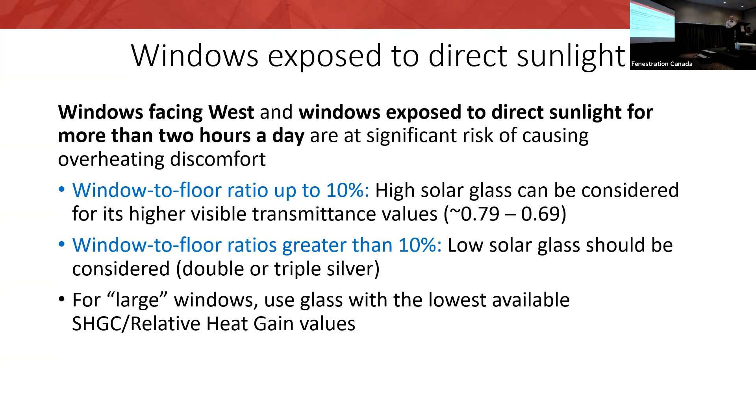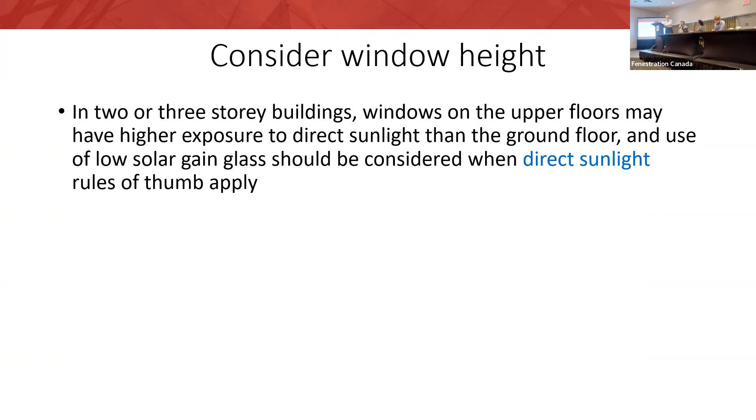Consider the height of the window with respect to the ground outside. In 2 or 3 story buildings, windows on upper floors may have higher exposure to direct sunlight than the ground floor, so you might need different glass in different parts of the building. With row houses having a garage and 3 levels above, some complexes are so tight that the first 2-3 floors aren't getting any sun, but the top floor probably gets a lot of sun. Builders will put the same glass in all windows, but we may need to start thinking about the top floor being more exposed, and certain orientations being important. I think orientation, height, and placement will become important when managing comfort.

Row houses on narrow lots and homes on narrow lots: typically the windows only face two directions, so you're kind of trapped. You might end up with east and west, which means you should really worry about solar heat gain, or north and south, which you'd worry about differently. As a rule of thumb, if you're dealing with a builder who just wants to build row houses, avoid high solar gain glass. Using double silver coating as a minimum just prevents problems and complaints. For larger windows, use glass with the lowest solar heat gain values, and consider that upper floors may require lower solar heat gain than the ground floor.

These are some rules of thumb. I'm not saying they apply in all cases, but if there's a way we can, as an industry, put this into words, concepts, pictures, diagrams, it might help people think about it. It might also be too soon - maybe not enough people are suffering yet to care about it enough to ask for that information, or to compel us to provide it. But I think as an industry we should be thinking about that.

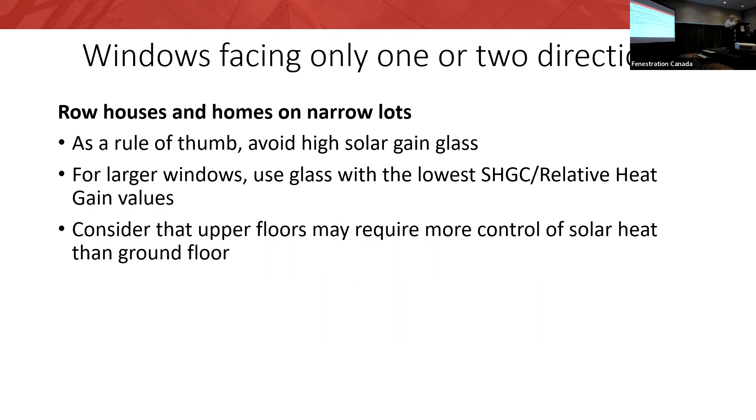So I put together one example to show the relative heat gain, and how it might influence your decision making, considering several windows that might be possible in a typical home. I'm reiterating here that in addition to solar heat gain, we can use relative heat gain to help us compute and compare the relative magnitude of solar energy captured by windows and doors of various sizes, something we can't do easily with solar heat gain alone.

By the way, one of the audiences for this presentation is architects. I'm going to make it available as something I promised to do for somebody, and I wanted this to be self-explanatory content. That's why I ran ahead and talked about things that are now in my text - I wanted this information to be there for the other audience as well.

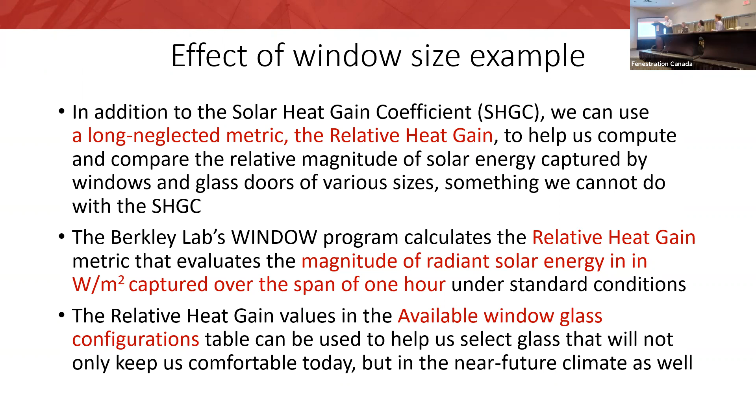Jeff Baker and I started working on an example like this for the A440.3 standard, where we felt it needed some guidance on solar heat gain. When Jeff and I discussed it, we were using the solar heat gain coefficient for these examples, but it was unsatisfactory because we had to assume some quantity of heat that comes out per unit area of a window, which we'd call X, and multiply the solar heat gain times X for different situations - larger windows versus smaller windows - trying to explain why a larger window might need a lower solar heat gain coefficient. I've reworked the example using relative heat gain numbers instead.

So here I've got the 3 relative heat gain numbers from the table. I think I used the double pane products with 1 low-E coating for this example. I put in 450 watts per square meter for the high solar heat gain, 260 for the medium, and 200 for the low.

Here's a window that's 16 square feet - this could be a small bedroom window in somebody's home, like a 4x4 foot slider. The window to wall ratio in this case is 13%. Your relative heat gain with a high solar gain is 670, medium is about 390, and low is about 300. Honestly, I think it's helpful to round these to the nearest 100 to really help people grasp it.

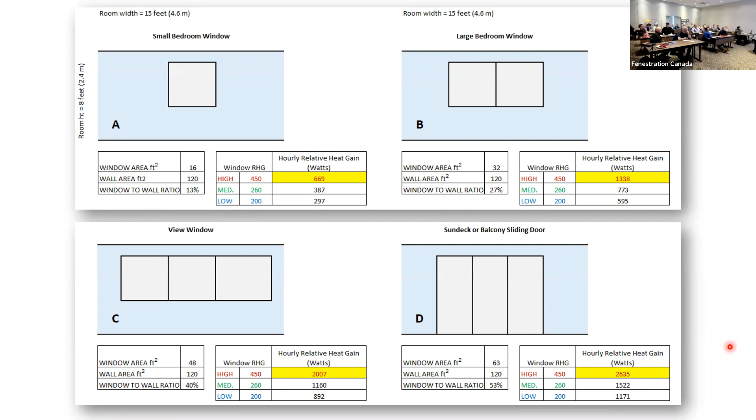And it also shows you that even if you choose the lowest solar gain product we have, that patio door is still going to be bringing in around 1,100 to 1,200 watts of energy per hour, which is not insignificant. So again, will examples like this be persuasive? Will they help people? I don't know. Again, I'm just taking stuff we have and seeing if this will help us with the conversation.

At this point, I'm not saying that it will, but I think the idea of an archetype chart or a configuration chart is a real helpful one. I think some work could be done to make sure that those numbers are good for the variety of single, double, triple silver coatings in the marketplace. I think that would be a helpful chart for the discussion, regardless what else we do. But I think we do need a more nuanced discussion about the future and about solar heat gain and cold discomfort. And hopefully this takes us a step in that direction.

Any comments? Yes, I have a question.

Is there any methodology of economy efficiency analysis of an existing window system in the house versus a new system potentially to be installed in the house - like the cost efficiency for spending on the HVAC? In other words, is there a way of coming up with how much heat comes through the windows for the purposes of sizing the mechanical system? Not really how much it will cost, but how much will you spend less - for the whole building, not just one room.